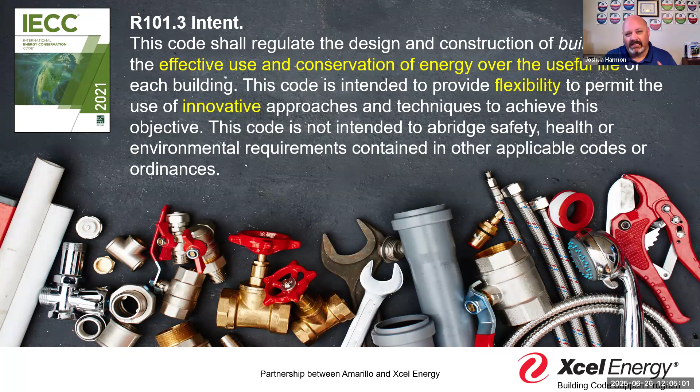The building code, whether residential or commercial, is really all about providing those minimum safeguards, those minimum expectations for uniform construction. We're looking at what components and systems in a building make it safe for both the occupants and the general public.

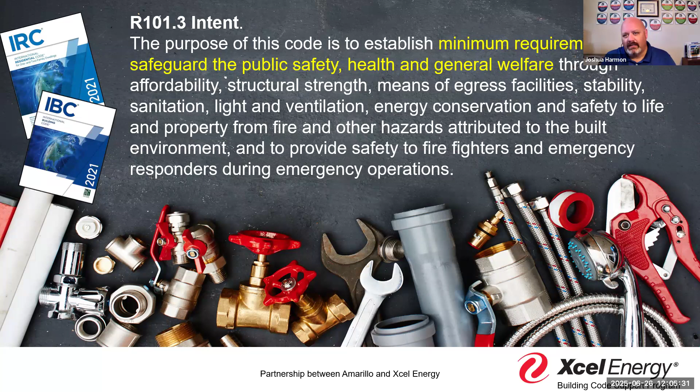And with that, we understand that the residential code has a series of plumbing considerations, plumbing sections, plumbing chapters in it, as well as what we see in the IPC, the plumbing code. The plumbing code is there to provide those basic understandings, those minimum understandings of how we design, install, and maintain those pieces of plumbing equipment.

So again, for me, that's always been a separate process. Actually, in Ohio, we'll begin on Tuesday, July 1st, the process of allowing building departments and health departments to combine forces, with building departments taking over the plumbing responsibilities.

Because as we see in most designs, unless it's a septic system, for the most part it's really the same process, and it's a more streamlined process to just use the building department to do the plumbing because it's part of everything we do. So again, that's a reality.

So that kind of lays out the why, right? We're looking to make sure that we have safe buildings that have access to these different facilities and that use technology and innovative designs to be energy efficient in that process.

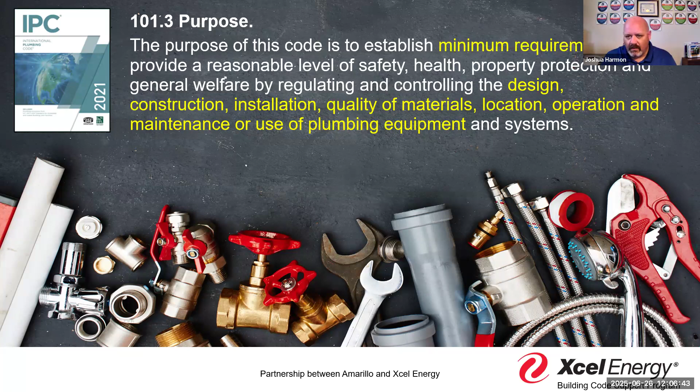But also, we have to remember the scope of the conversation we're talking about. Remember, the energy code in the residential section gives us a definition of what residential building is, and that's a little bit different than in our traditional residential construction code. Residential construction, we're looking more at 1 and 2 family dwellings, maybe townhouses, 3 stories and less above grade. If we take that 1 family dwelling and make it 4 stories, we jump into the IBC. If we build that hotel, R1, R2, R3, R4, we're going to the commercial code.

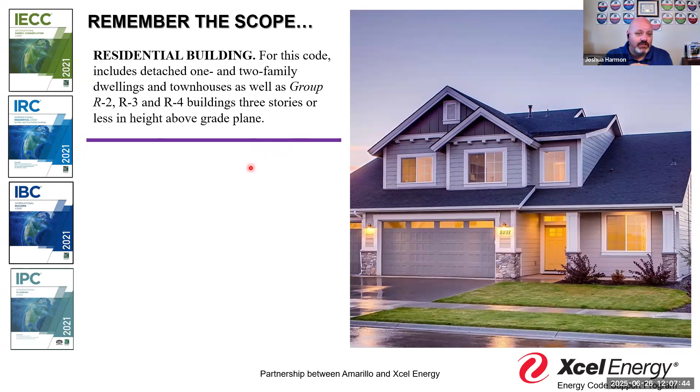Well, the energy code says we're going to treat residential the same, regardless of the method of structural construction. So it says residential building is any detached 1 and 2 family dwelling, as well as townhouses and groups R2, R3, and R4, 3 stories or less in height above grade. So again, we have to understand what it is we're looking at in the scope, not only of the building, but also of the project. We'll talk more about that here in a second.

But when we get to those mixed occupancies, a building that's got a little bit of residential and some commercial space in it, remember: if it's under 3 stories, it follows residential. If it's over 3 stories, it's commercial. If it's a commercial occupancy that's not one of those R2s, R3s, R4s, then it follows the commercial provisions.

So a lot of times when I've had a building that has multiple compliance methods or compliance sections on it, we got to where we'd actually visually depict that. I'm all about the visual, I'm a simple guy. So what we would get was plans that said, here are the units that are following the residential code, and here's the unit following the building code.

Here's the units following the residential energy and the commercial energy. We see that once in a while, maybe I've seen it in a couple plans where the hotel has said, we're going to have this many ADA compliant units, and this many designed for auditory versus visual versus other specific designations for accessibility. Again, when we see it like that, the one that comes to my mind immediately was a visual depiction - there was an actual layout of the plan that says here's my auditory units, here's my wheelchair units, here's my visual impairment unit. So you had that clear understanding of which ones are being used for which purposes.

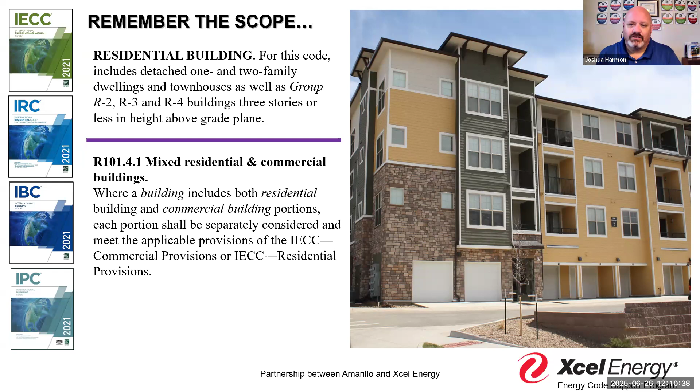First floor is going to be residential to a point, and there's going to be commercial areas where we got the pool, the workout area, the little office areas, the lunch area. We can visualize how we would lay out and distinguish residential from commercial. And that's one of the ways I like to do that when we talk about mixed use. A lot of designers I work with, when we talk about it that way, say that's really a great way to make complete clarity as to what we're doing - let's do it visually. This is going to be this, and that's going to be the other.

That further builds on this concept of what is, well, if we've got a definition for residential, then we have to have a definition for commercial, and commercial's definition is anything that's not residential, right? So again, simple. So again, we can kind of parcel out what's the scope of the conversation.

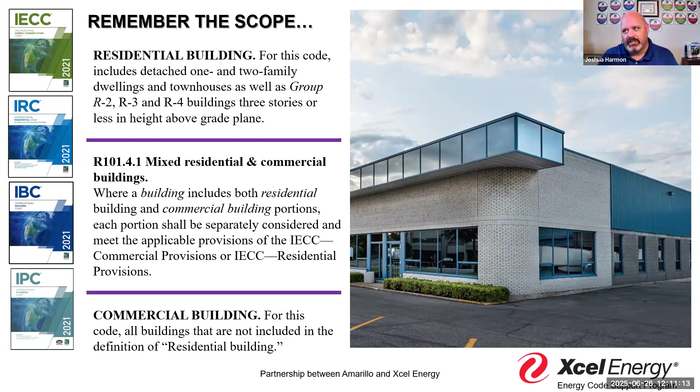But when we start talking about the relationship with the plumbing code, we really get into the scope of what is the work, right? And my brain is very simple. I like a simple process. I like my 4 pillars of energy code with 4 pieces of each component. So when I look at the plumbing code, whether that's the residential provisions or the actual IPC, what I see is really 6 sections, 6 concepts. And the first is going to be fixtures, right?

And fixtures, then we get into this concept of supply and distribution. If you had your IPC out and you looked at your chapter settings, you would see this layout. We've got this concept of fixtures, this concept of how do we get the piping there? How do we get that water from the source to the termination? That's going to be through a system of supply and distribution lines. Then we're going to have service water heating equipment, right? What are we doing to heat some of that water to make it usable?

And then we get into drains, right? Whether those are sanitary drains for getting rid of waste or storm drains for managing water flow. Again, drains concepts. Then we get into venting, which is sometimes a part of a little bit of both the equipment and some of those drains, right?

But we got venting and traps, right? In order to properly exhaust and prevent influx of that exhaust into a system, right? So we really got these main concepts that we see identified throughout the plumbing code.

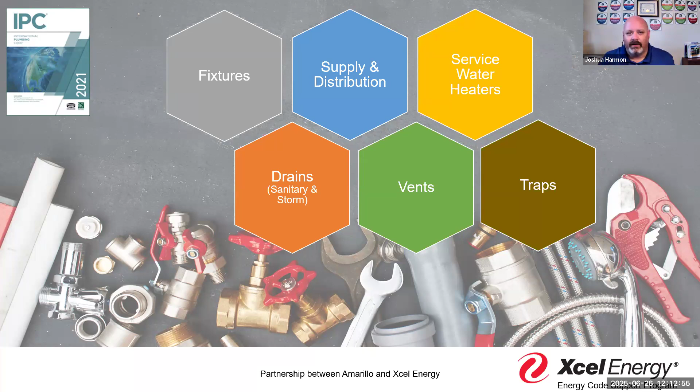When we look at the energy code and that relationship, each one of those concepts has an energy component to it to some degree. When we think about fixtures, we think about controls, right? How do we control that fixture is the outlet distribution termination, right? So when we think about it from an energy perspective, how are we controlling that fixture?

When we talk about the distribution system, the piping that gets it from the source to the termination, we think about insulation, right? So we have insulation. Service water heating systems are obviously a major component in our residential and commercial energy code compliance.

Drains, we start talking about drain water heat recovery, right? How are we going to use technology? We wouldn't have thought, who knows? It wasn't common 40 years ago to build thinking about hot water was inside the waste line as it went out, and whether or not we could recapture some of that hot water, some of that conductive heat, and reintroduce that into our heating systems, right? But it's an option that technology and materials have made it easier to accomplish.

We talk about pools. Those are a reality. They're maybe not necessarily the vent that we're looking for, but again, it was just something to throw in there. Keep the common concepts. But then when we get to traps, we talk about heat traps. Again, how to and that kind of concept.

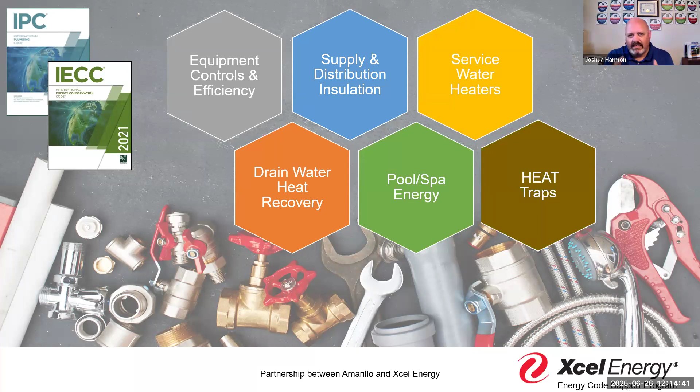When we start talking about that, as we go through this session, this webinar, we'll kind of see each of those sections and how they correlate.

Now, when we start off with fixtures, the plumbing code provides for us a table that we can use to calculate the number of fixtures required. And so based on occupancy types, based on occupant size, that creates for us this requirement. We have to have so many spots to correlate back to, to require in the building the minimum number of fixtures.

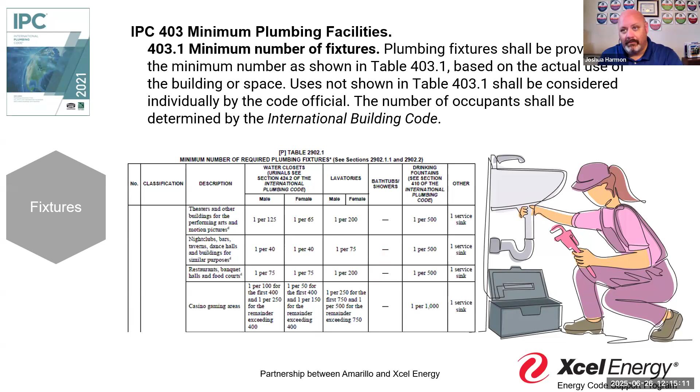We look at the residential, and the code tells us again that each unit, there are some minimum expectations for plumbing facilities, right? We're looking for these minimum expectations. So we're used to those two concepts, that we have minimum number of plumbing, minimum number of fixtures in a building. We currently understand that in that process, there's a relationship with our mechanical code, especially when we start talking about this example here of a commercial operation, right?

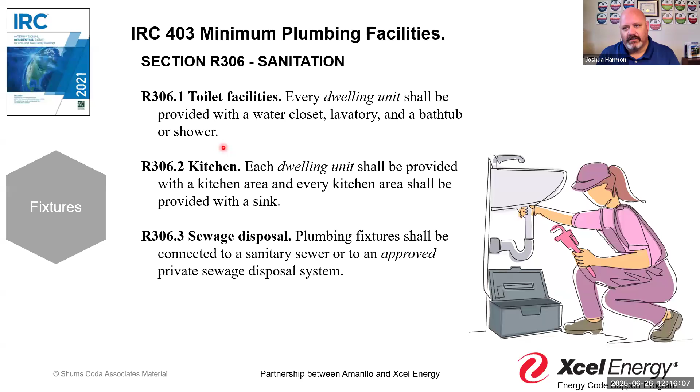We do the same thing in bathrooms. We have a requirement that we have toilet facilities that provide water closet, lavatory, and bathtub. But then we also require ventilation, natural or mechanical, in that toilet room, because we want to make sure we don't accumulate too much condensation or moisture in that space. So the same concept: we want to exhaust out bad fumes as well as moisture that might accumulate in these enclosed spaces.

We typically understand that plumbing code will interact with mechanical code through section 403. We talk about the minimum ventilation rates, and if we look down, we can see that we base that on the capacity of the room, the capacity of the facility, which gives us a number of fixtures, and based on that number of fixtures, we determine how much ventilation air is needed.

So we zoom into those public spaces and public toilet rooms. We understand we have to provide an amount of air for each fixture, so 50 CFMs per fixture. If I have 7 urinals and water closets in this room, then I multiply that by my 50 units, my 50 CFMs, and I get 350 CFMs of air movement in this particular room. We do this calculation throughout all of our mechanical plan reviews to verify that we get the right ventilation.

We do something very similar when we talk about bathrooms. We go to bathrooms and say, in residential homes, I need to have some kind of exhaust. Is it intermittent or continuous? Great question. You tell me, right? What's going to be required in your design?

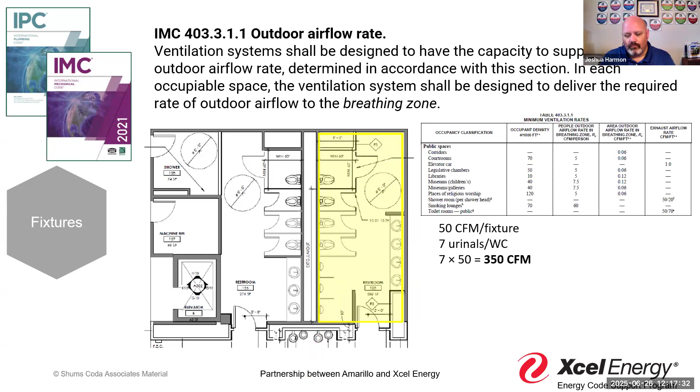Where we interact with the energy code is we say, okay, we see you have these devices, these mechanical systems in place, so what is the level of efficiency and control of those fans? That's when we start asking questions about how we're controlling those pieces of equipment, how we're making sure we get the right size, that we didn't oversize and put a 5 horsepower fan in a room that really only needs a quarter horsepower, that we didn't oversize the system and now we have this jet engine activating, sucking all the air out of the room. We do that all the time, not just to make sure we don't have overpressurization, but also to make sure we're thinking about energy conservation and energy use.

So we see here, we've got the rights, we've got this unit, this exhaust fan, we see the CFMs, we see the size, and then we know we've got these other notes that say what kind of controls we're going to have: to run continuously during building occupied hours, and during unoccupied hours, they'll remain off. That's what we want to see, the efficiency of the equipment and the controls associated with it.

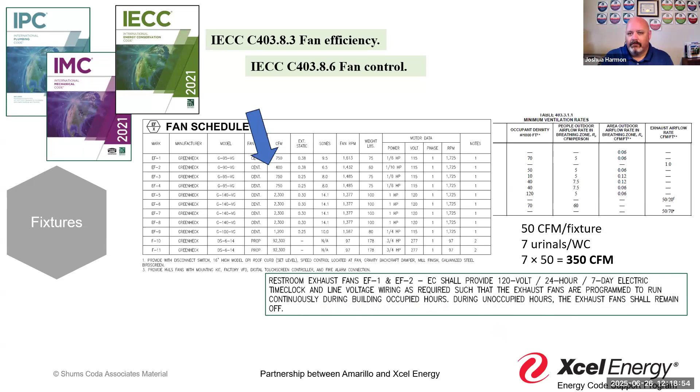That's one of those places where we have that correlation between our different concepts. Again, section 303.2 in the IPC tells us that when we install materials, they have to follow manufacturer's installation instructions. That concept sounds very familiar, because it's universal across the code, the entire family of codes.

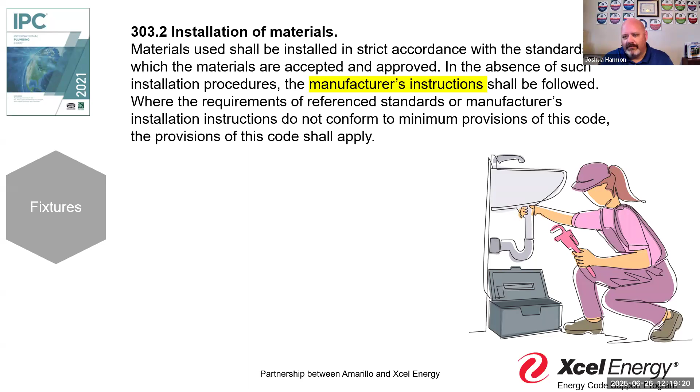And so when we look at it in the context of residential systems, and we see this both in the IPC and in the IRC, we get this idea that when we install something, we have to install it to make sure it's protected, so that we're protecting it against corrosion, and against accidental penetrations or impacts.

When I go through and I hit it, my son decided he wanted to put the TV in his room this weekend. So we went over and I got the stud finder and we went through the studs. We found the stud, and then I could nail in the nail to hang the mount. If I had a plate, then I would know that I'm in a space where maybe a line or something was there. I'm trying to protect, I'm going to put those plates in place to protect against damage.

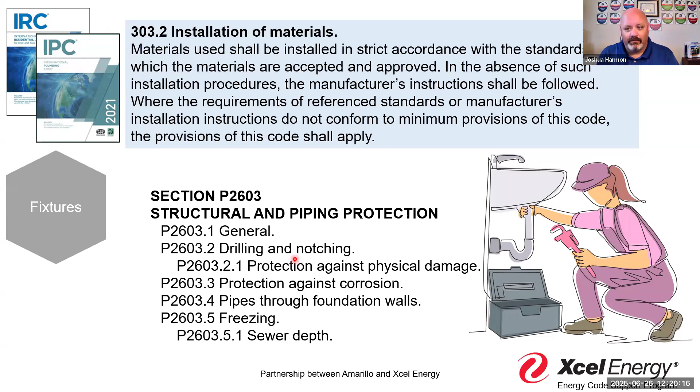That's a concept that we see identified in the IRC, the IPC, for equipment. We can understand those concepts. Those are also concepts we find in the energy code, where we're trying to address penetrations of our building thermal envelope, our air barriers. We're trying to protect those same concepts.

So whether it's through the proper installation of materials or the proper protection of those plumbing systems, we're still trying to figure out if that plumbing line runs through my air barrier or through my thermal envelope. Then not only am I protecting against penetration and damage from nails and other things, but I'm also going to make sure that it's properly sealed and gasketed. That's a requirement in both the plumbing codes, the plumbing provisions, as well as the energy code. We want to protect against uncontrolled, unregulated air movement for both fire protection, smoke protection, and thermal heat loss.

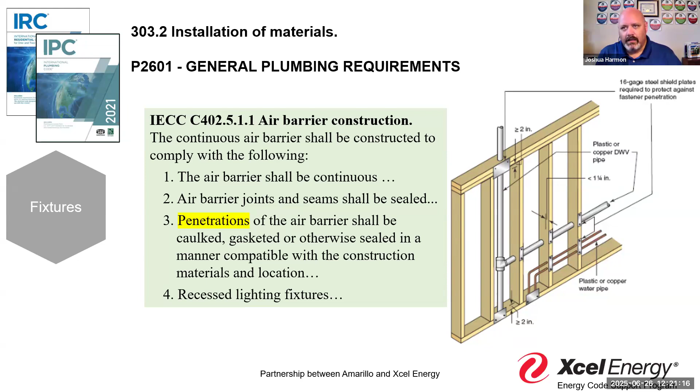So again, one code trying to accomplish 15 things, or one project under 15 different codes. I'm exaggerating, it's not 15, right? But again, our energy code goes through this process of, we've got an air barrier, we've got systems we're trying to protect the same way we protect our plumbing materials.

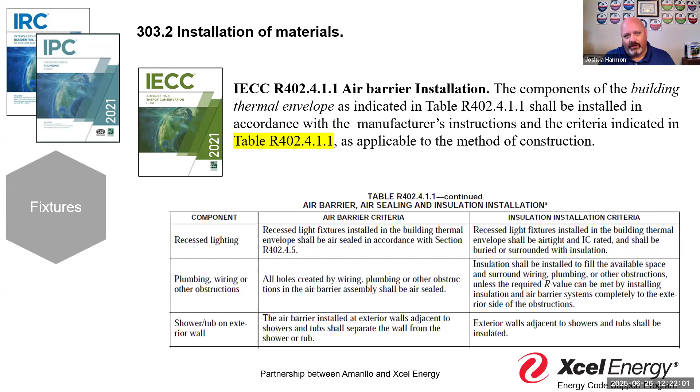And so it gives us this table, and in that table we see plumbing, wiring, and other obstructions, and what we're supposed to do to protect those and install them in context of our air barriers and air sealing expectations, as well as our shower tubs, right? We've talked before about our wall designs and air barrier designs trying to account for these types of systems. So there's a relationship between the two. Install it properly, and then make sure that in that process of installation we didn't affect our air barriers, our air loss, our air and heat loss expectations.

So again, a visual example reminder. This might be something as simple as making sure we properly seal, as well as we properly insulate, right? Those are two different concepts that we see in buildings.

And one of the realities that exists, I'll use my personal example for this one. When we bought our home, it's a tri-level home, built in 2007, somewhere around there. And when we first moved in, we made the basement area underneath our master bedroom suite the office.

And so one day my wife was upstairs, new house, going to take a nice long shower in her big jacuzzi garden style tub. So she's taking her bath, and I'm sitting downstairs in the office doing some paperwork. And every once in a while you just lean back and look up. And I looked up and noticed two little dots that were discolored. And I thought, well, I don't remember ever seeing those before, because I would have surely brought that up and tried to paint over them, right?

And so as I look at it, I'm staring at it. I do what every person does, you get up there, you stand on something, and you touch it to see what it is. Well, when I touched those two little circles, probably about the size of a dime, they were wet. And I'm listening, and my wife's in the shower, in the tub, and I'm thinking, what is that? There's no water running. It's not a large amount of water. What is it? So I go upstairs and find out she's taking a hot shower, hot tub bath.

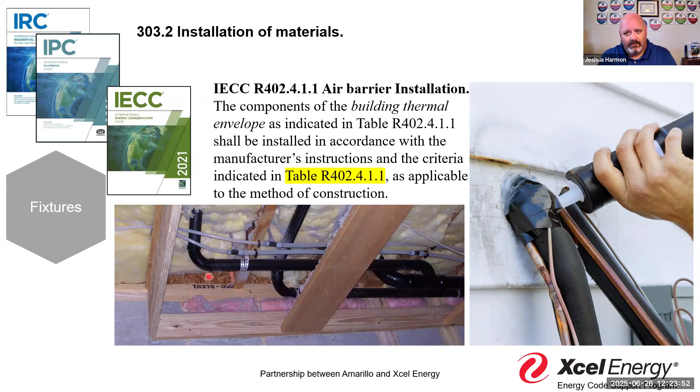And what we end up finding out is that there was no insulation, right? There was a lack of insulation under that shower stall. So the temperature of the water was creating condensation in relationship to the exposed air underneath the shell, in this exposed area. And that condensation was beginning to accumulate, drop to the ground, and was starting to penetrate into that ceiling system, right? That's exactly what we're trying to prevent against. We're trying to make sure we have continuity and a set of designs that don't allow for that accumulation of moisture.

So when we install it properly, the code would tell us that we need to think about the air barrier to make sure we don't have uncontrolled air movement through these systems. If we want air movement, that's fine, control for it, right? Ventilate it. Make sure you're keeping it consistent and potentially dried or undried. Or when we start talking about humidity in the air, or humidity coming off of the shower stall or the bath stall, right? Because it's not like these are temporary uses in every instance.

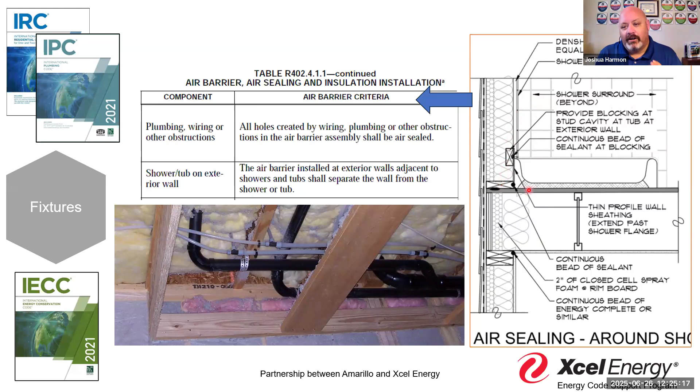There are times when the shower takes 5 minutes, you're done, right? Especially if you have no hair, it's 5 minutes, you're in, you're out. But there are times when you may want to sit in that tub for an hour, right? And keep re-adding more hot water. Oh yeah, keep that hot water, right? Well, then you're going to accumulate more potential thermal differential between the shell of the tub and the surrounding air.

And so you're going to get condensation, and it's going to create problems. Condensation is never good. We don't want to trap it inside our assemblies. And so again, that's where we're trying to control for that by insulating, filling these available spaces.

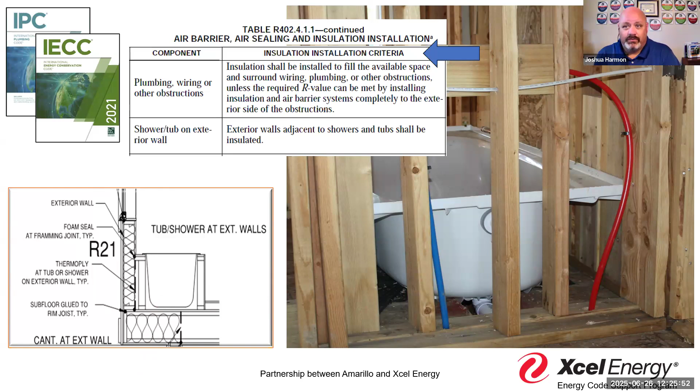To prevent moisture accumulation, we do that through a variety of different materials. But we want to make sure we go back to our 303.2 from the IPC, or the residential requirements for plumbing systems, and make sure we are installing them in accordance with the manufacturer's installation. Does that manufacturer say we need to put a polyplastic, polyurethane coating? Does it require us to use mineral wool so that we don't have the pipe sweat interacting with cellulose or some other material that would become more affected by that moisture condensation?

Are we going to install those pipes inside a wall system that might be prone to freezing? And so again, we see in this diagram where we're going to install a 1-inch pipe insulation around the pipe that's running through the insulation. We want to make sure we don't compress this insulation, and that we still maintain that insulation. There's a variety of different components we're dealing with.

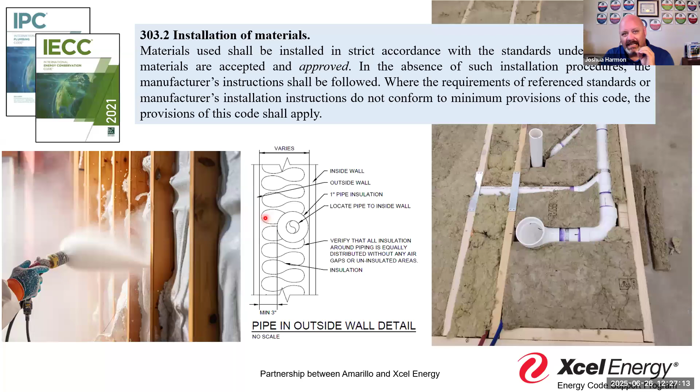We don't just say throw in the pipes wherever you want, we'll be back on Thursday to see if it's done right. No, we want to make sure it's designed as best as possible to understand where those fixtures are going, how the pipe is going to get there, and what level of protections and methods of installation we're going to be using to get those fixtures where we need them.

This also applies when we talk about those pipes and vents that penetrate our different systems, like our roofs or air barriers. If I have a system that penetrates our roof, the code tells me I need to put some kind of sealant material to restrict the entry of water into the building.

Are we going to allow for that typical vent pipe, where we've got hot air going up, coming into contact with that cool air during the winter, accumulating moisture, falling back down? Now we have moisture accumulating on our batts of insulation, as well as in the relationship with our drywall.

Or are we doing it in a way that we try to allow for moisture to dissipate, to give it more air movement? So there's a variety of different situations where we need to think about the warm versus cold climate impacts of that vent pipe. And so again, that's where we start to have this conversation, this dynamic relationship between our plumbing code and our energy code, because we don't want to create a system of problems or a set of problems.

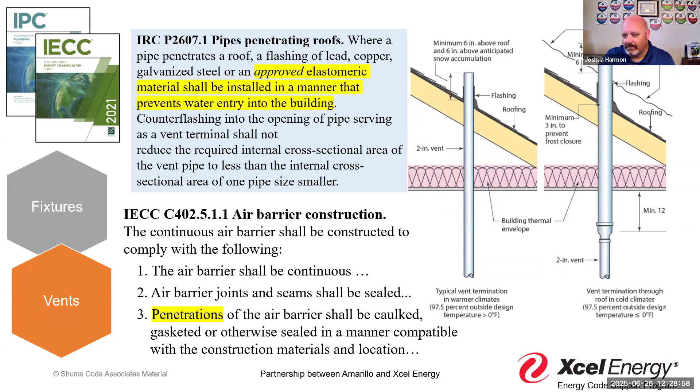And again, we might see that on a plan where it says we're going to have some continuous sealant, this bead of sealant, as well as flashing at the top of the termination. So again, we want to make sure we identify these in those plan details, so that we're not coming out there at the end saying, well, the plumber came out and said this is okay, so you can't look at it anymore. Well no, there's plumbing connections and there's plumbing that affects building components.

And so again, we have multiple types of codes, and so it's important to us to educate and reinforce those expectations between our different inspection agencies. Again, like I said, in my county, where I've worked, and have worked in several different counties, they've all been this way. The plumbing inspector and the building inspector are in different offices, different buildings even. And so once in a while we have to get together and say, hey, we're all looking at this the same way, just to confirm that we're talking about the penetration that goes through this assembly.

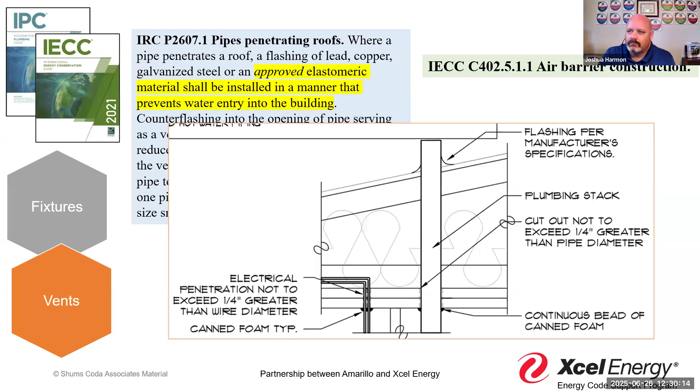We're expecting it. It is required to have some type of sealant or caulking, and that we're considering these impacts. And so again, it's part of that communication that we see in that air barrier. We start talking about fixtures, and we start talking about those supply distribution line sets.

We start thinking about why are we distributing water through the system. Is it part of a hydronic heating system, or is it part of a service water heating system? Are we looking at a mechanical space conditioning system, or hot water to drink or to make coffee?

Because if you affect my coffee, we're going to have problems, right? Am I like Pavlov's dog? As soon as I bring that cup within reach, I have to drink. I think I might be. It might be a social experiment right there.

Digressing completely, but again the energy code tells us that if we have hydronic heating systems, space conditioning that uses mechanical piping to carry fluids, then we have to insulate them to a minimum of R3. Why? Because we're trying to prevent condensation on the exterior wall of that pipe. Again, we're trying to control for condensation.

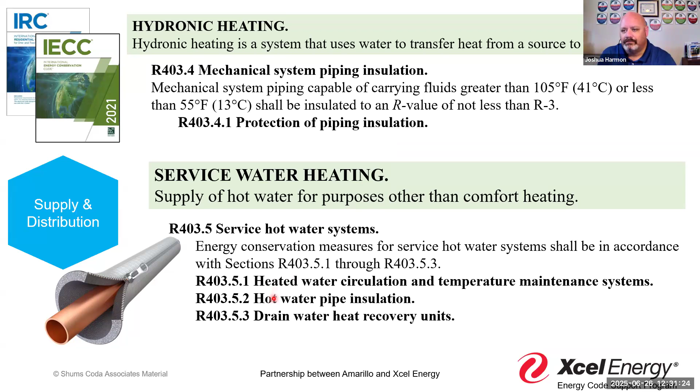Similarly, when we start talking about service water heating systems, we're trying to get that hot water to the sink so that when we wash our hands, we have nice warm water. The code reinforces that we need that R3.

Now, what we see in the code when it comes to these types of insulation requirements is that we have certain levels of insulation for water heaters, and we have insulation that's part of our piping system for the 2s, 3s, and 4s, as well as others. So again, the IECC is redirecting us, saying insulation needs to follow the energy code.

If you look at the UPC, the Uniform Plumbing Code, it says that if your supply line is 2 inches or less, you have to put 2 inches of insulation. If it's greater than 2 inches, then the thickness of the wall insulation has to be the diameter of the pipe. So it's giving me the size of the insulation.

Well, if there's one thing we know from the energy code, it's not a question of the thickness, it's a question of the thermal resistance value. We talk about that all the time. It's not that I need 4 inches of insulation, I need this R value of insulation.

So you can tell me 4.5 inches of insulation, but until you tell me what that is giving me as an R value, I'm not going to accept it, because I need to know the resistance value, not the general thickness. I can do 4 inches of R3 and give you R12, or I can do 4 inches of R8 or R7 and give you R20, R28. I can have completely different expectations of that insulation.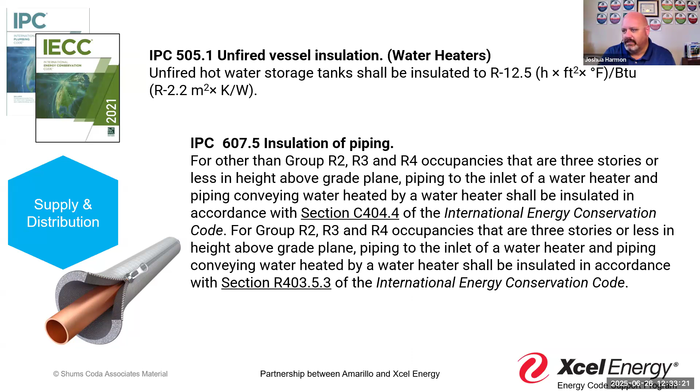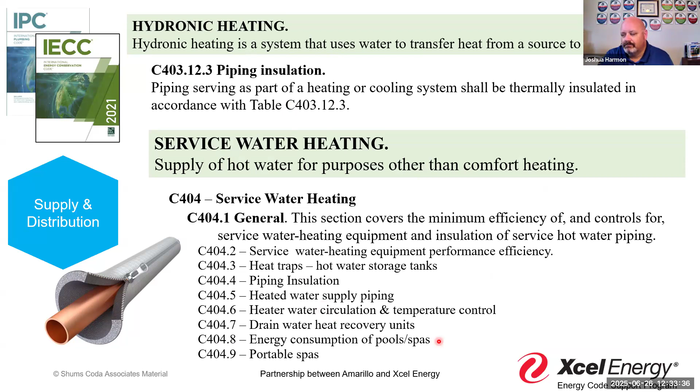And again, when we look at commercial, same concept: hydronic heating, service water heating, they need to be insulated. They've got a table that gives, based on the value of the insulation, what's expected. And beyond that, it also gives us the ability to use either a heat trap, or we can use heat tracing.

What we're looking for is that heat trace will give that hot wire that allows that pipe to maintain temperature given the exterior environment temperature. And so there's going to be certain expectations of how we use those systems together.

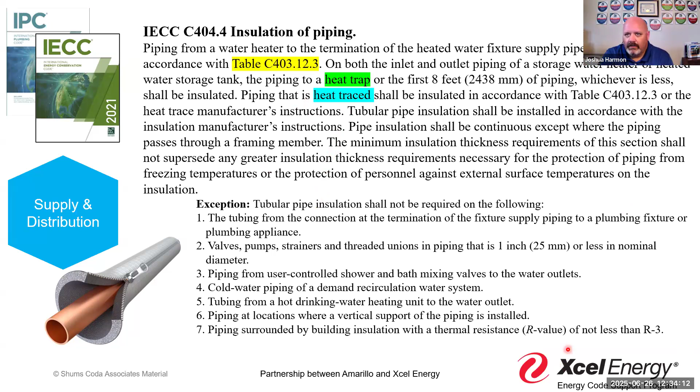If we look at that table, I think I shortened it in order for us to see it. So when we start talking about that table, based on the temperature of the fluid going through it—if it's just a hot water line between 105 and 140—based on the size of the pipe, that's going to tell us how much insulation we need. We can understand what we're looking for in that thickness and our thermal ratings.

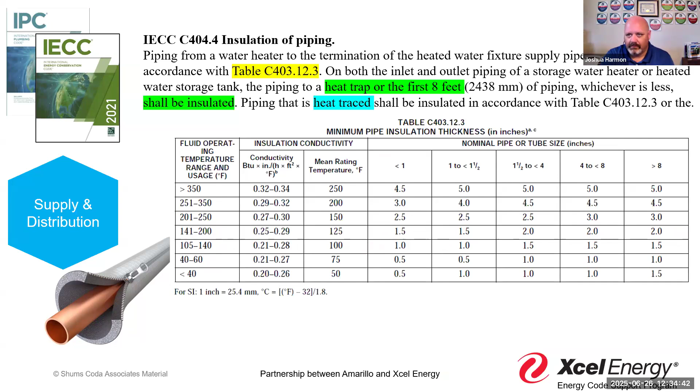One of the things we also see, especially in commercial energy code, is it starts talking about the maximum pipe length. If we're depending on the amount of water flowing through it, we don't want a pipe that's endless in the amount of water that may exist between the source and the termination at any one time when there's no movement, because that's going to cool over time.

Remember that R3 insulation is not going to protect it or keep it warm, it's going to prevent moisture condensation. So what we're trying to think of is how much water is going to be wasted or exist in that pipe. We can either calculate the volume of that pipe in ounces of water per foot of tubing, or we can calculate the maximum length of that pipe based on the size of the pipe.

Whether we want to calculate the volume or calculate the length, the code gives us that flexibility. But ultimately, what we're looking for is making sure that if we're supplying hot water to something, we're not running that hot water across 300 feet of pipe before it gets to the final termination point.

This is a conversation that, a lot of times when you do commercial plans, nobody really looks for as far as designs. Once in a while you want to spot check that contractors are following this, to make sure we're not running a hot water line across an entire commercial building and then finding out we don't have enough hot water when it gets there. So we have to run it for 20 minutes to reheat and retemper that entire length of pipe, that 15 gallons of pipe that ran through, just to get to the other side.

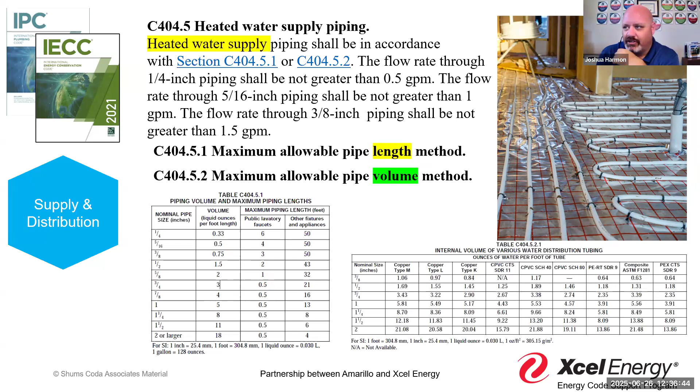So again, that's a digression, but it's important to consider that relationship between plumbing design and energy code compliance. This gives us some examples of how that's done.

Zoom into those: size of pipes, volume of liquid per foot. At 2 inches or better, you're looking at 18 ounces per foot.

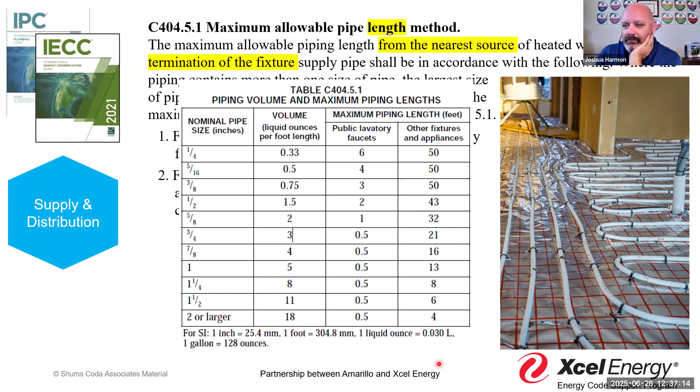Depending on that, we want to have a maximum length for those public lavatory faucets, between that fixture and the last recirculating pump or similar device. Here's the volume based on the type of material, and different sizes will allow or carry different volumes.

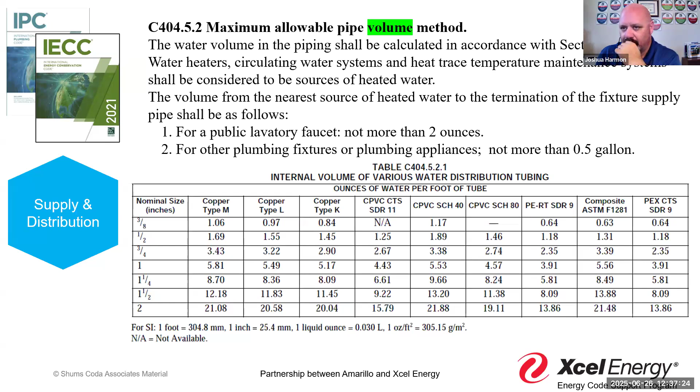Part of the recirculating pump's job is to activate and make sure we isolate areas of cooling water, so that we're recirculating rather than trying to force hot water across, say, 400 feet just to use a high number. This pipe is only going to be carrying that heat for so long.

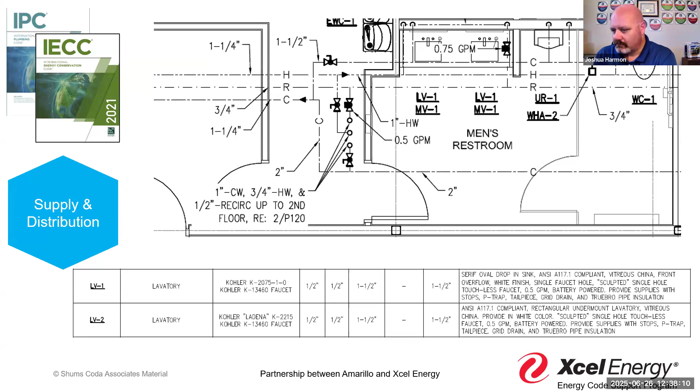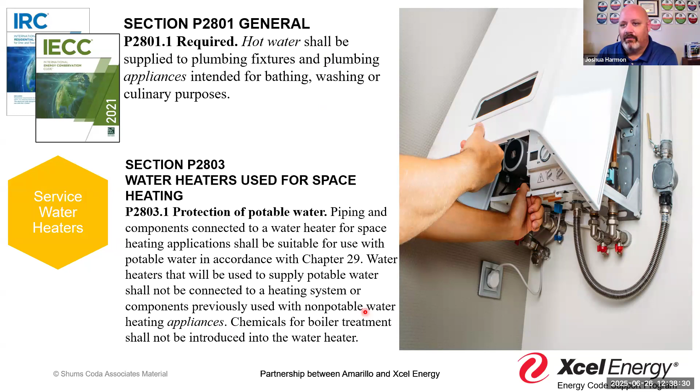Another thing we think about, to keep this conversation going since I've got plenty of slides left: one of the major components we talk about in plumbing is the service water heating system, hot water tanks. The code requires that we provide hot water, obviously, and that we protect that hot water. It also provides an understanding that hot water could be used as part of a space heating system.

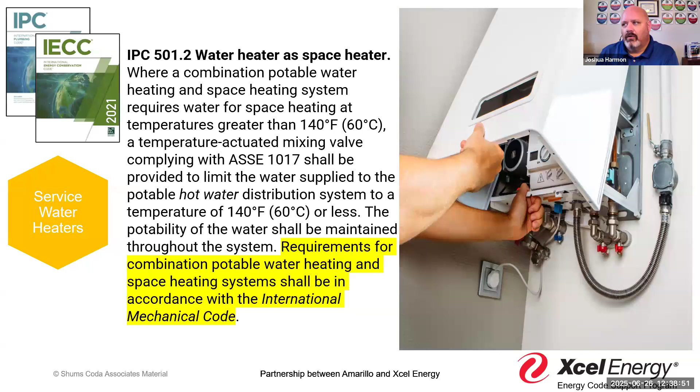But what we want to remind ourselves is that while we're thinking about the plumbing code and the residential plumbing provisions as they affect the amount of hot water we need, the energy code has its own considerations for that hot water service. The plumbing code says how much we need; the energy code says, now that you've got that piece of equipment, how efficient is it when it comes to energy use, and what considerations come into play regarding controls and temperatures.

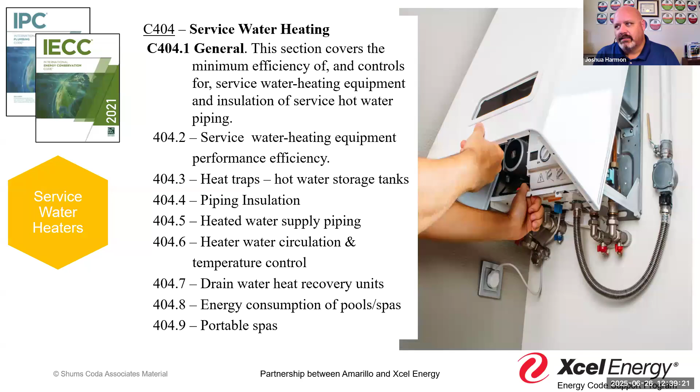Especially in commercial applications, we get into controls a lot more than we do in residential. But when we talk about these systems, it's a question of control and performance efficiency. In commercial, you've got a table you can go back to and ask what level of efficiency you're looking at. When we look at it from a residential perspective, we're looking at where it falls in our minimum expectations for equipment.

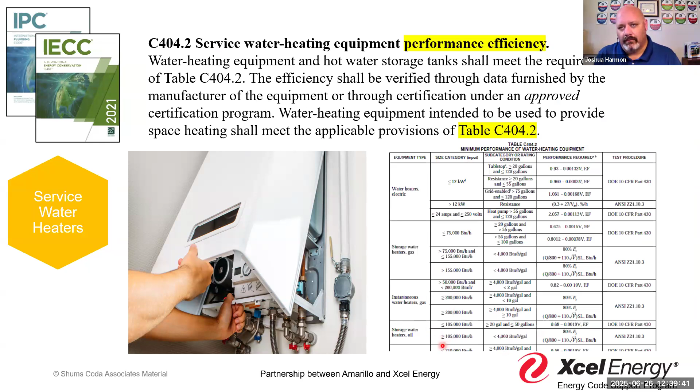The commercial provisions also address large systems, high input service systems. If we've got 1 million BTUs or more, it gives us some expectations, so that we're not always looking at that table like we do in regular commercial.

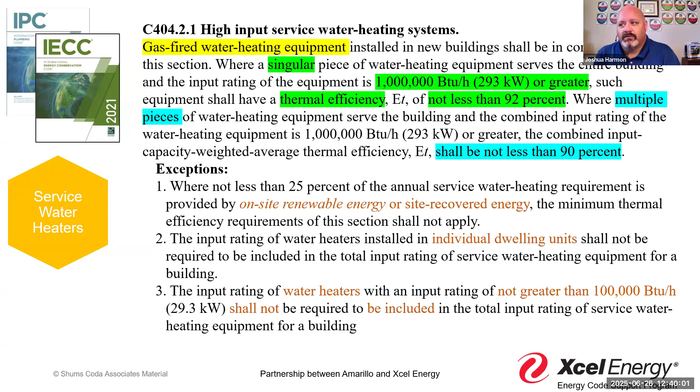When we're thinking about that hot water system, especially in commercial operations, we're following a system where the plumbing code told us what size we needed, the energy code told us how we evaluated. So the plumbing fixture comes in, it tells me I'm getting a 50-gallon tank, it's going to have 76,000 BTUs of gas, and it's going to be 94% efficient equipment. When we look at that from our table at C404.2, based on the size and capacity, we need at least 80% efficient equipment. We've got 94, we've passed that. We'll find that kind of information once in a while on a COMcheck.

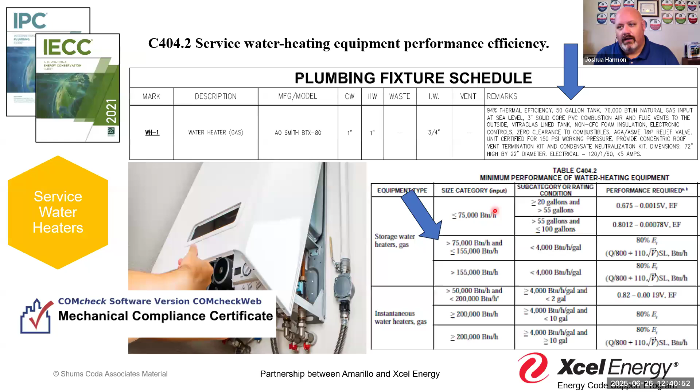Similarly, I like to see that evaluation on my residential. If I'm looking at a residential water heater, I want to know what it is, and I'm going to say, is it going to meet my 80% efficient, my 78% efficient, depending on where I'm at in the codes? It's going to have to meet that.

One of the things I want to point out for those following a commercial project is that some of those designs may allow a project to meet its requirements for additional efficiency credits or requirements. So if we see in this example, right now we've got a 94% efficient furnace or water heater. If we went to 95, then we get those additional efficiency credits. So it may be easy for us to say, well, we're going to make this a little bit more efficient, we're going to go to 96. It's going to cost the same, but now we're going to get those extra credit points that we don't have to do later in a different system.

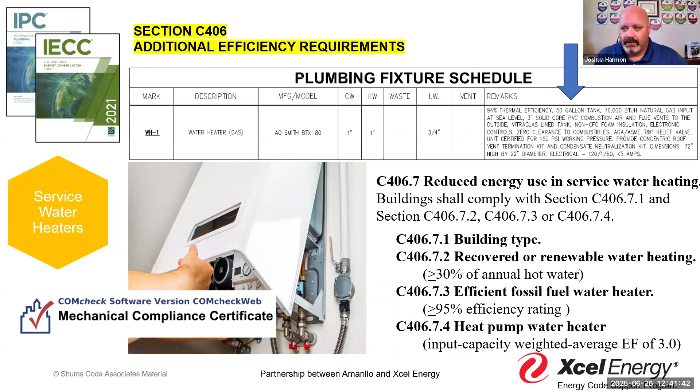Same thing with reduced use in residential. We start reducing that amount of energy used for water heating because of efficiency designs, then we can start to bring down what we're expecting. So if it's an 82 or better, we're going to be able to take into account some of those efficiency expectations.

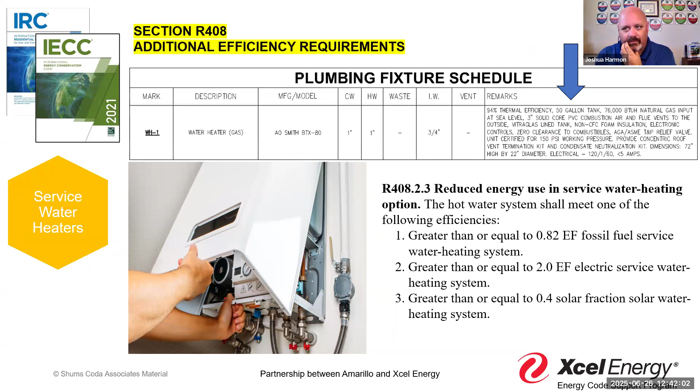Now, like I said earlier, this is a real conversation that we have all the time when we start talking about that relationship between different codes. When we've got an existing system and we come back to replace it, the energy code says I need to have an alternate new equipment, and it needs to follow the energy code. So I'm going to be thinking about it there.

One of those realities, my sister was looking at what kind of replacement water heater, and part of the conversation was looking at a tankless. I said, well, one of the things you want to make sure you do is think about how big your pipes are to get to that location. This is a very similar design to what she currently has, she has a gas furnace, a gas range, and a gas water heater. So when this was installed, it was sized to provide enough gas to get these systems to fire consistently.

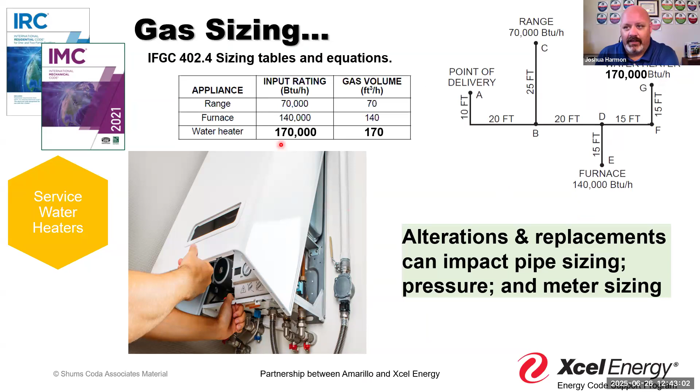If you go to a tankless, you need to start to evaluate what the gas requirement is. If you increase this gas by 4 times, is this system, either the piping itself delivering it or the regulator at the street, capable of sustaining that level of demand? Again, alterations and replacements can impact the size, the pressure, the meter, all of those things. So it's not just a simple swap out, and it's just a plumbing conversation. It may have bigger implications.

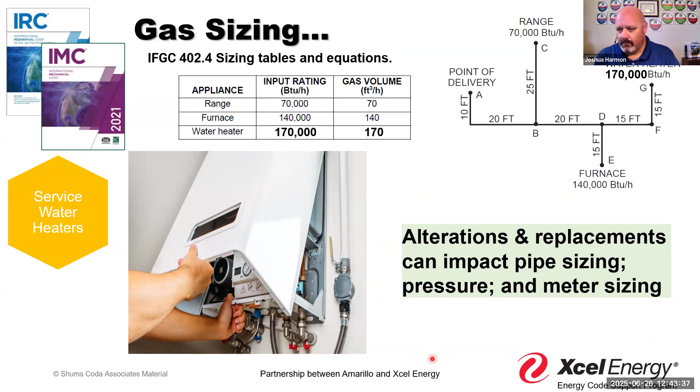Like we said earlier, when I think of traps in that conversation of plumbing code, I also think of integral heat traps. Remember that heat trap is going to be designed or at least detailed to be in your water heating equipment to provide a structural component, a modification to the line that prevents or impedes the amount of cold water re-entering the heated tank, as that pipe sits there.

And again, think about this: last week I was in Texas, saw many of you there. My family went to camps or we're on vacation, and for pretty much an entire week, no one was home. So what would happen naturally, without that heat trap, is that water sitting in that pipe going to the back bathroom, all the appliances, it goes to the washer, it goes to the dishwasher, it goes to the kitchen sink, goes upstairs to 2 different bathrooms and plumbing fixtures there.

All of that water over time will cool, and then that cool water, without a trap, will just naturally and uncontrollably flow right back into the water tank. And that water heater is going to cycle more, turning on for a little bit as the temperature gets low enough. Even though no one's going to be home for a week to use it, it's still going to use energy.

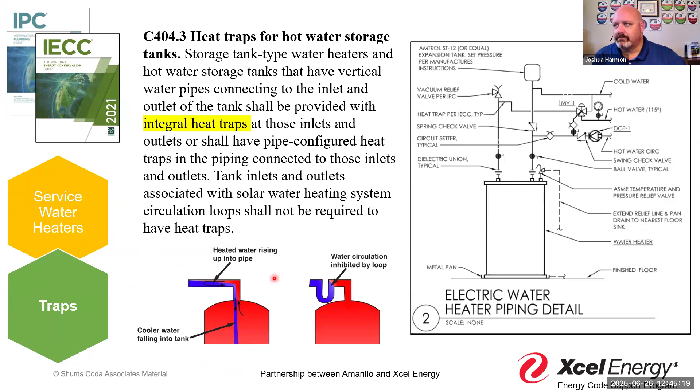So what the code provides is that we're going to have some kind of heat trap or heat trace, as well as possibly controls that tell the system if it isn't being used, it doesn't need to be reheated.

So that's what we're looking for: some type of temperature maintenance system. In commercial, and sometimes residential per code R403.5.1, automatic controls, temperature sensors, and pumps shall be located in a location with access. We want to make sure we're controlling the temperature even though no one's home, so we're not overcompensating.

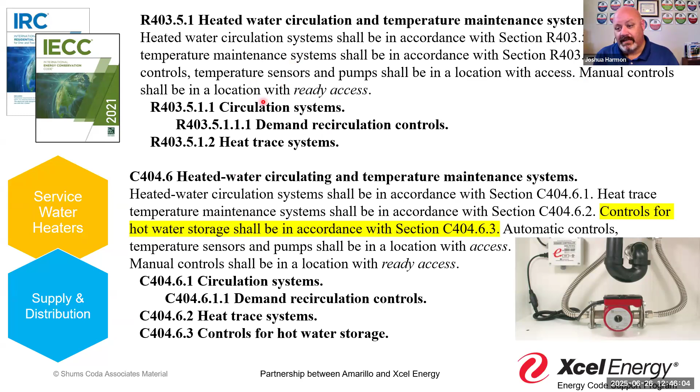If we go on vacation for a week, we automatically turn off the pump, that recirculating hot water pump, when there is no demand for hot water. There's nobody home, so the pump doesn't need to run, and the tank doesn't need to compensate for heat being lost. Same thing in the commercial zone.

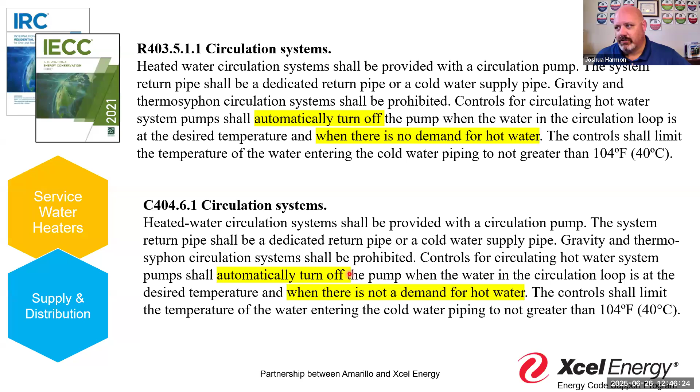We'll see that once in a while. I was actually looking at a plan yesterday for a new building going up where they integrated the same door occupancy sensors we see in commercial into a traditional residential unit. So when the kids go into their room, the heating system turns on.

Or it resets, right? The temperature will reduce to a certain level when no one is in that room, and when they go into the room, it will reset. Then when activity is no longer sensed for 20 minutes or more, it returns to that lower temperature to reduce the amount of energy used.

Same concept with their water system. It's connected to the entire building, so when someone actually goes into a room, it starts to think, well, what if somebody wants the bathroom? They walk into the bathroom, and it starts to get the pipes ready, sending that potential signal that hey, we may be needed.

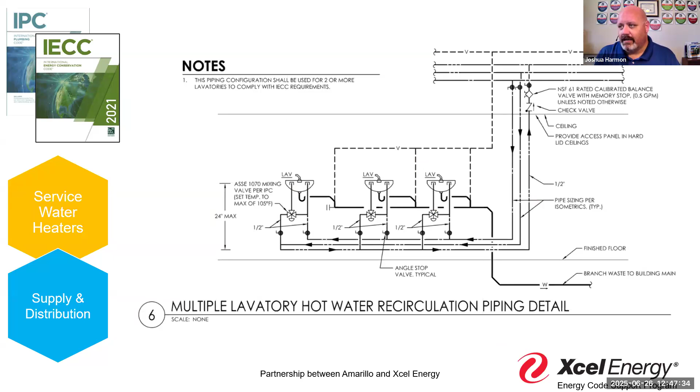So again, we're starting to see more technology integrated into our systems to make buildings more efficient in how they operate. And again here we see more demand recirculation controls being required and identified. Now this one in commercial: demand recirculation water systems shall have controls.

And in residential, it's that where installed, these controls will start the pump upon sensing the presence of a user. So at this point, it's more of a 'if you're going to do it, you're going to do it this way,' and maybe in future code versions that becomes more of a requirement. But more importantly, I'm seeing this more and more in designs where people are trying to decrease the size of their system by compensating through intelligent controls.

Remember, the plumbing code and plumbing provisions do not restrict the size of a tank. It tells us the minimum amount for a tank, but it does not give us a maximum.

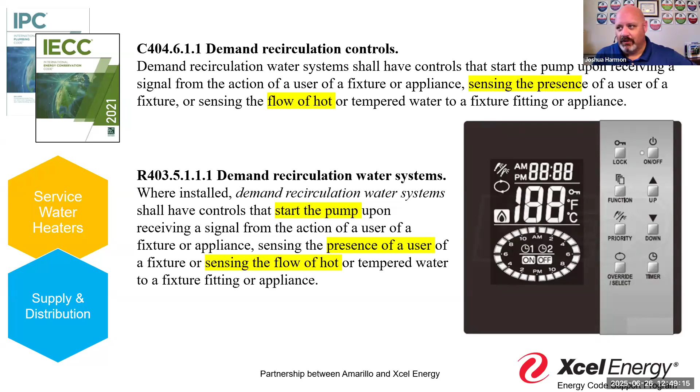If I had, now you guys know I have 4 children, 3 boys and 1 princess, and so if I had 4 princesses, I guarantee I would have gone with a 500-gallon water tank, right? It wouldn't have been 50 gallons, it would have been 500, because I know one young female in my home can spend a lot of time in the bathroom getting her hair just right, taking that 20-minute shower that drives me crazy. So again, having that kind of technology may be something we see come into a design, especially with the way we're designing buildings newer and cooler every day.

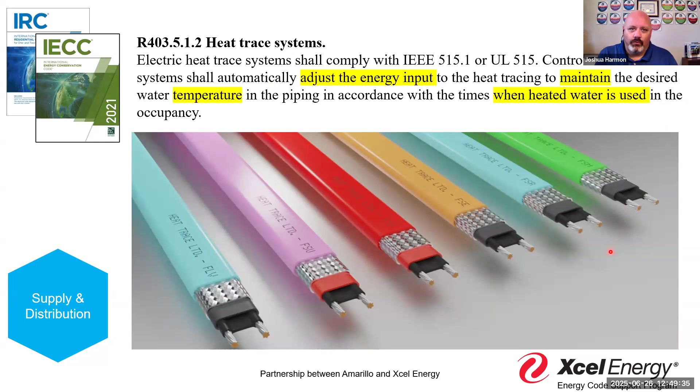Again, if we're using a heat trace system as part of our residential design, we need to make sure it adjusts to maintain that temperature when it's needed, so it's not constantly on 24/7, 365. It's on when we're looking at that temperature that's needed, both for residential and commercial. Again, turn off that heat when we're trying to control it.

One of the things I've seen employed and utilized in designs is where there's concern about freeze thaw, or pipes freezing. That's probably not as big a problem in the panhandle, but if it becomes a problem, this may be a good alternative for people who don't want to insulate below or in certain areas, whether that's in an attic or in some kind of pipe chase. They may choose just to go with some kind of heat trace system to maintain the temperature of that pipe to prevent any potential damage.

I see this in a variety of different settings. I've seen it in steel framing, where we're trying to maintain the temperature of the steel so we don't have to insulate. I've seen it in pipe chases and industrial side units.

We have a lot of fresh vegetables, I don't know if you guys have so much of that, you have more cattle, but we have a lot of farmland. In some of those cooled industrial complexes, they will actually put heat trace on the pipes as they're in the building, because the temperature in the building is low enough that they don't want those pipes to freeze inside. We have buildings that maintain temperatures in the 50s and 30-degree range, and so the pipe chases have to be insulated to protect against this.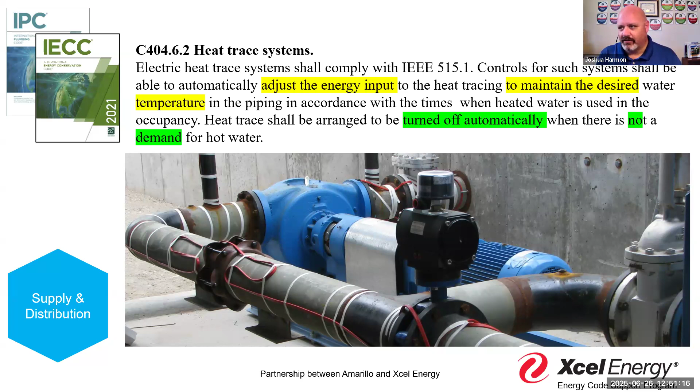One of the things we see on the commercial side, and like we said, it sometimes creeps its way into residential, is all of those controls. Making sure that we're not constantly running things, if we think about the city building, municipal building, or some of those offices downtown, when the employees go home at 5 o'clock, there's no need to run those tanks again. Those tanks can actually go into a shutdown or a lower maintenance temperature than when there's actual people on site.

I've seen this happen a few times, even in residential, where that occupancy control, when it's unoccupied, reduces it maybe to a 100-degree temperature, and once the building is occupied, then it increases back up to that 140, 130 temperature. So that 30-degree modification is much easier to manage than maintaining that difference over an entire 16-hour period.

This might be something you see, and more importantly, I bring this up as we think about some of those compliance path options. When somebody's using cost-based compliance, this can actually be something that gets brought up: how do we control those systems? I'm going to be spending money regardless of whether there are people in the building when this is running. So that might be a way to reduce energy consumption and therefore energy costs, by putting in advanced controls that decrease or affect the heating equipment based on occupancy levels.

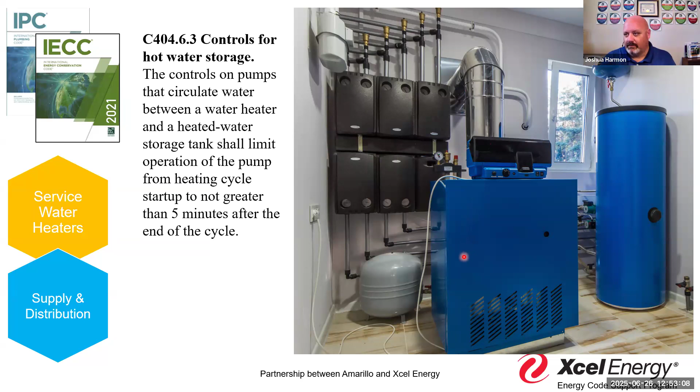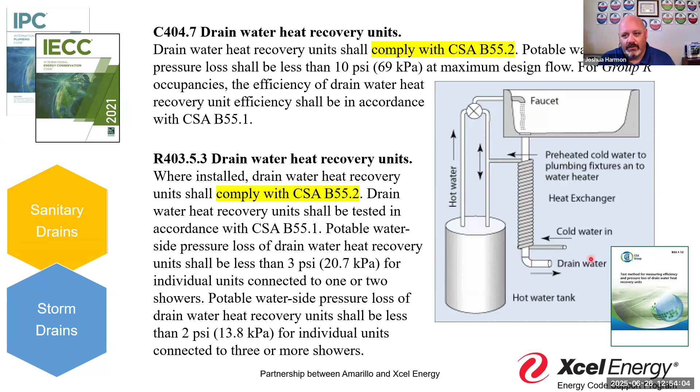Residential or commercial can go both ways, but as we talked about those drains earlier, one of the things we see identified is that drain water heat recovery system. Now the code doesn't say you have to have it, it's where installed. What we're looking for is to make sure that if you're utilizing the natural heat inside a waste drain, some drain water, some drain system, and using that existing heat to return back as hot water, or return the heat of the conductive nature of that heat into the water tank, there are certain standards. That's the whole point: if we're using a different system to recapture some of that heat, we're going to make sure it follows that CSA when it comes to those designs.

One thing I think is important to think about in the context of both residential and commercial, it's not necessarily in the plumbing code or plumbing provision so much, but it does affect water. I thought I'd bring up pools, whether that's residential or commercial. I put the commercial here just because, why not. Residential or commercial pools that are heated are required to have certain controls for their heating, whether that's a timer switch or something that says when it's being used, it's being heated, and when it reaches a certain temperature, the heater turns off.

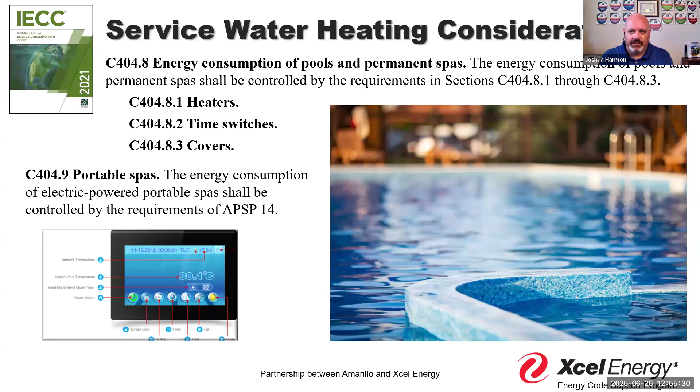Again, if it's a cover based on the information that's there, is that heat being provided by on-site renewables, or is it just part of the normal heating system? Then we might require covers, right? There's different expectations that exist for those types of systems. I think that's one of those things when we talk about residential, you don't really think about it as much. The biggest thing to remember is if it's a heated pool, not just a pool, but a heated pool or spa. That's when we're talking about these systems to make sure we are controlling and evaluating how they're controlled and how much energy is being used in the system.